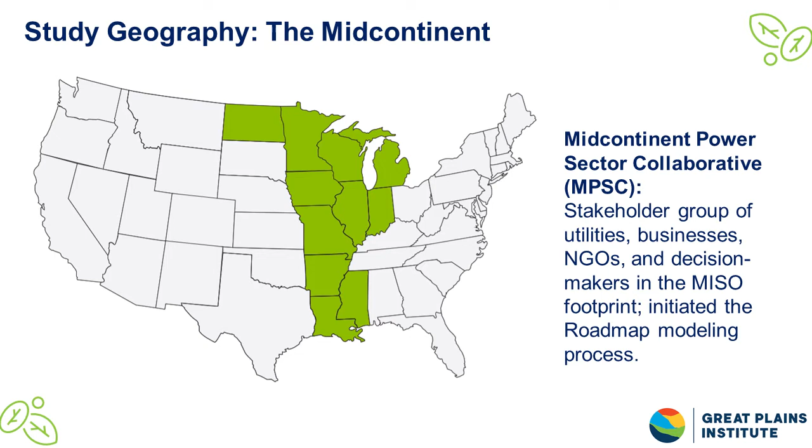This is the key geography that Doug alluded to, that the Midcontinent Power Sector Collaborative stakeholders honed in on to identify the study states for analysis across the roadmap. It extends from Minnesota, North Dakota, all the way down to Louisiana. You'll also see another map in a couple of slides, which is more of a configuration to the MISO footprint that Doug was talking about. But here you can see the states that we were thinking about.

So there emerged a handful of high-level strategies available to tackle building decarbonization, and we'll see how each of these thread through the presentation today. The first is enhancing building design to be more energy efficient, occurring both through new construction as well as improvements to existing infrastructure like retrofits. The second is finding alternatives to fossil fuels, including electricity and renewable natural gas. And finally, technology innovation—both improvements in technology as well as advancements in deployment of technology, with particular emphasis on heat pumps.

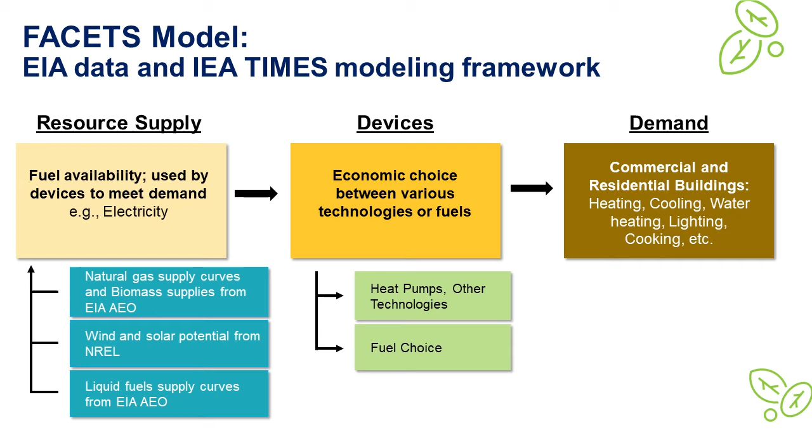So a model called FACETS was used to analyze decarbonization scenarios throughout our process. It utilized the EIA Annual Energy Outlook data and the IEA TIMES modeling framework. The diagram here shows an extremely simplified schematic of how the model works. It first assesses the resource supplies on fuel availability—an example of that would be the electric generators that might serve a heat pump. It then determines the most economic choice across all technologies and fuels or devices. Finally, it assigns use—the end use or demand for each of those devices, including building energy uses like heating and cooling, as well as a couple others. So like I said, very simplified, but it gives you an understanding of how the model flows.

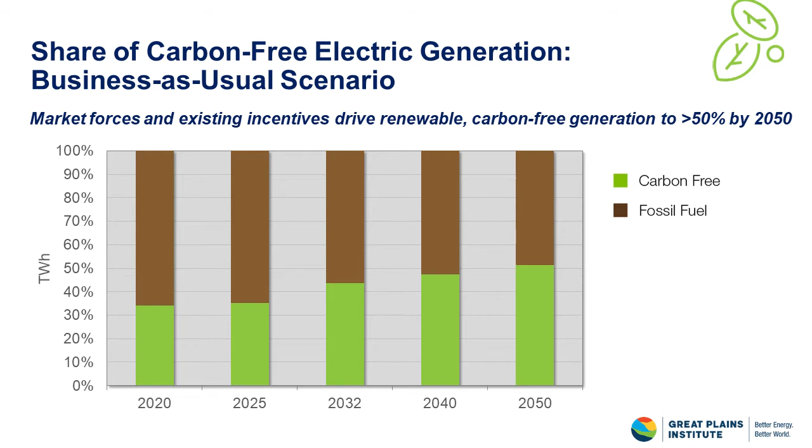This graphic provides a breakdown of the percent of generation from carbon-free sources over the 30-year modeled period. We see that market forces and already existing incentives do drive renewable and carbon-free generation to just over 50% by 2050, but there remains quite a ways to go to full decarbonization.

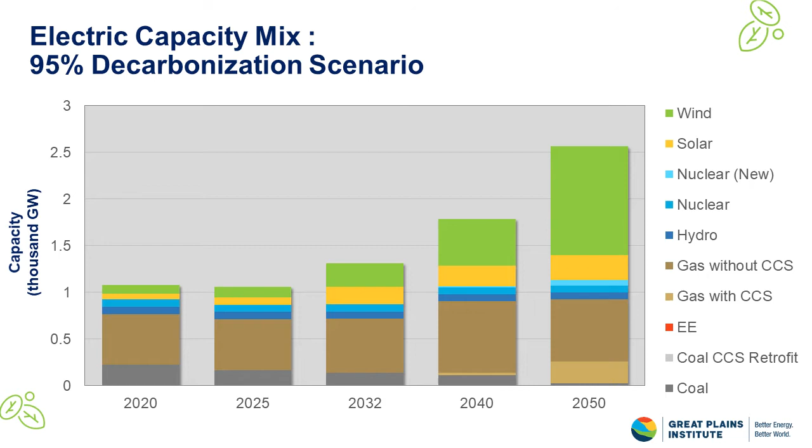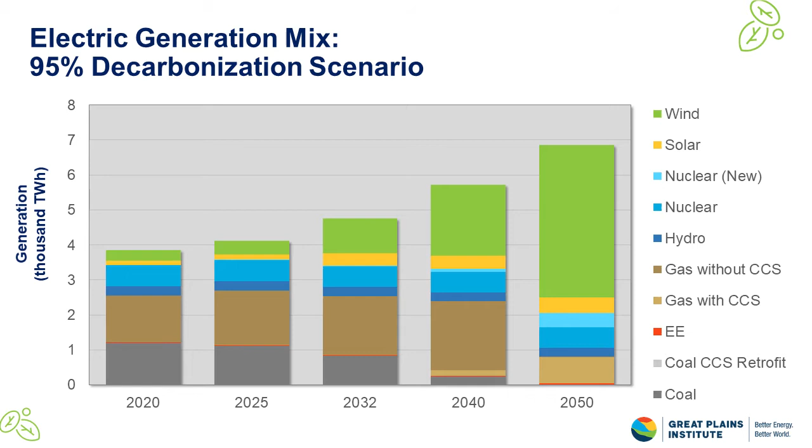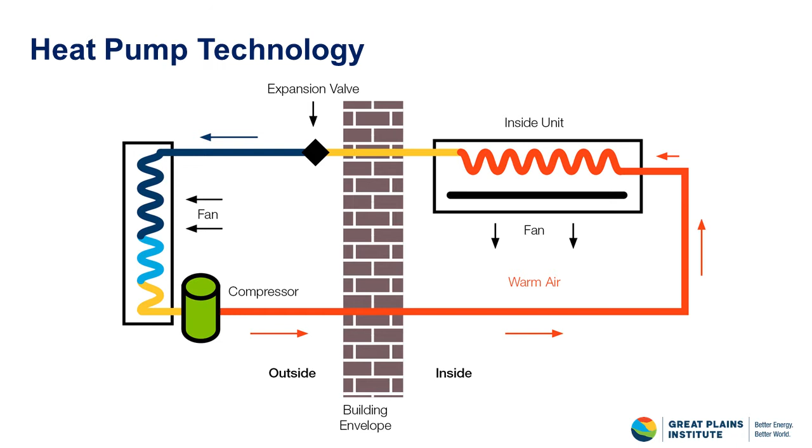Across thousands of scenarios run, we found that reducing barriers to adoption and improving technology were key factors in reducing building emissions. So we isolated the key factors most determinative of emissions reductions to identify key scenarios to analyze. The first was speed and rate of heat pump technology deployment across the Midcontinent, which captured both advancements in technology as well as adoption.

The second was heat pump technology performance, which determined whether backup heat is required below 10 degrees Fahrenheit for heat pumps, or if it can be supplied to augment a heat pump that functions on a linearly decreasing basis down to 20 degrees below zero.

So when I refer to this moving forward, it'll be backup versus linear. For linear performance, as heat pump capacity degrades linearly with temperature - it doesn't work quite as well the colder it gets - the backup requirement is the difference between the total demand and the amount of that demand the heat pump can supply. So it's somewhat simple math.

Third was whether the assumed hurdle rate, which serves as a proxy for the component barriers that could prevent heat pump adoption, may include cost, education, etc. Whether that hurdle rate more closely resembled a 20% cost adder or a 7.5% cost adder. So when we say low investment hurdle rate, we're saying we're going to reduce it from 20% to 7.5% in the analysis.

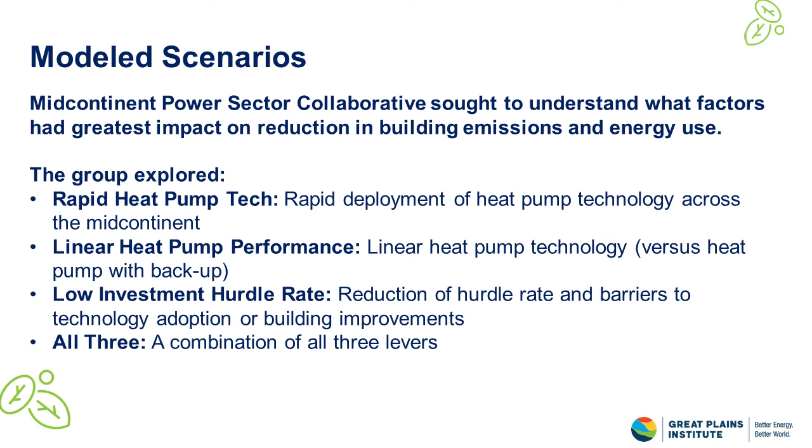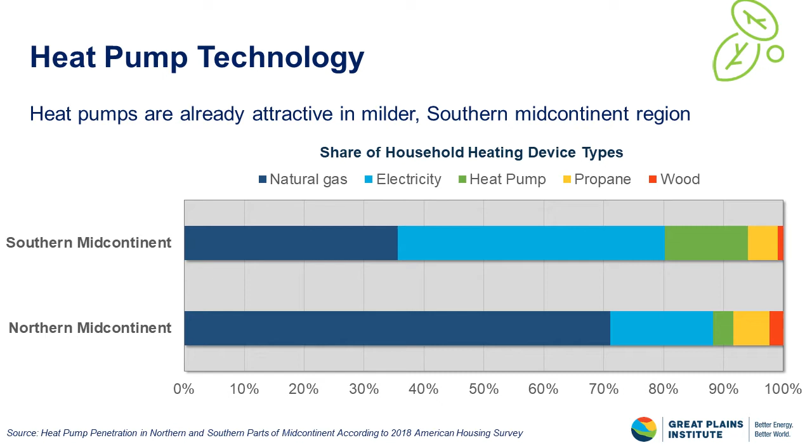The next couple of slides will dive a little more into the findings around heat pumps in the Midcontinent. We already understand that present-day adoption of heat pump technology is directly related to regional climate. The graphic shown here is household fuel technology estimates for both the southern Midcontinent, the top bar, and the northern Midcontinent regions of the study area. You can see the existing proportion of households with heat pumps shown in bright green. Historically, we have seen heat pump adoption occur organically in the southern Midcontinent as a home heating and cooling technology. However, heat pumps have been much less attractive in the colder climate of the northern Midcontinent, just because the backup fuel is required and climatic conditions pose additional barriers.

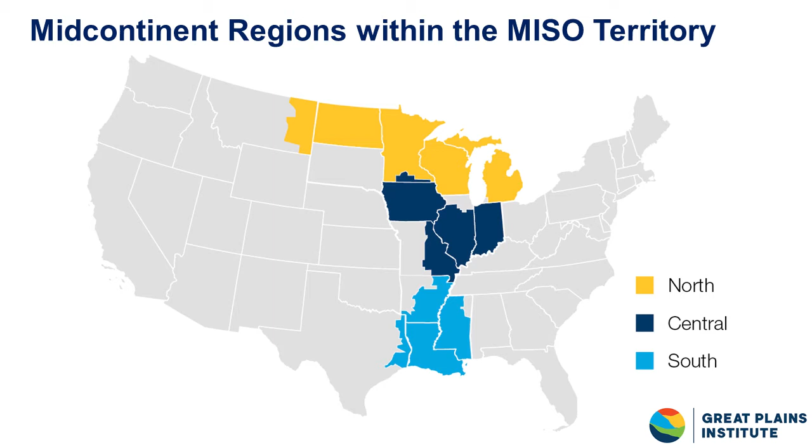This graphic is showing share of device counts, or the number of installed devices across all households, by year for the northern region. Because this is showing share of technologies chosen for install, it's important to understand that there may be households with more than one device—for example, when there's a supplementary technology to a heat pump, like wood, which you can see in this graphic, or natural gas, chosen as the backup. This doesn't indicate the consumption from technologies or that the technologies are all being used the same amount. We also know that some technologies, like ductless mini splits, automatically include an inherent backup, which is electricity. So if they were chosen by the model, there would automatically be two devices added for one household.

If we look a little more closely at this graphic for the northern region of the Midcontinent, the main area of the graph at far left shows business-as-usual share of devices from 2020 to 2050—what do installs look like if we do nothing? For the northern region, you see a moderate increase in heat pump installations, though natural gas forced air, room air, and central air still dominate the share of devices through 2050.

To then investigate those scenarios, we isolated the last 10 years of the analysis, 2040 through 2050, bordered in this black line, to investigate the impact of each of those scenario levers on the building device counts. As in the previous graphs, heat pumps are shown in bright green, and the key finding is that each of the scenario levers does result in heat pump adoption and penetration—across those four broken-out 10-year periods, the share of green is increasing over time.

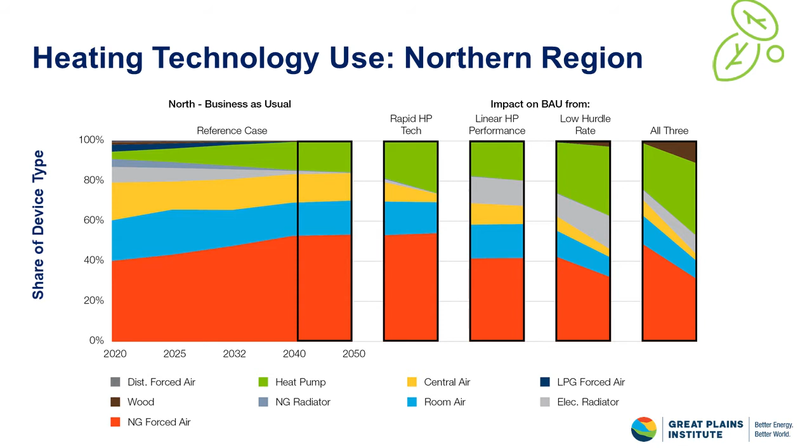We also see that when either the technology is more advanced for the northern climate—the rapid HP tech scenario—or the hurdles like cost are reduced—the low hurdle rate scenario—we see the most significant impact on heat pump adoption. However, the greatest impact is available when, as we learned, all three levers are implemented.

So now that we're familiar with the graph, hopefully we see the same thing for the central region. We immediately note the different distribution of device installations across the business-as-usual period, 2020 to 2050, but there's far greater organic heat pump adoption due to the more mild climate of the central region. However, we do see that electric radiators and natural gas forced air, along with central and room air conditioning, still comprise the bulk of devices installed across the reference case.

When we isolate those same key scenarios, we find that heat pump technology advancement has the greatest single impact on adoption, resulting in a decrease in both room air and natural gas forced air as compared to the baseline. A reduction of the hurdle rate also has beneficial impact on heat pump adoption, with a similar profile for other devices as did improvements in heat pump technology.

Linear heat pump performance also results in increased adoption, though devices are largely supplanted with electric radiators. And when we stack all three levers, we see the greatest heat pump adoption, as well as replacement of most natural gas fuel technologies with electric alternatives.

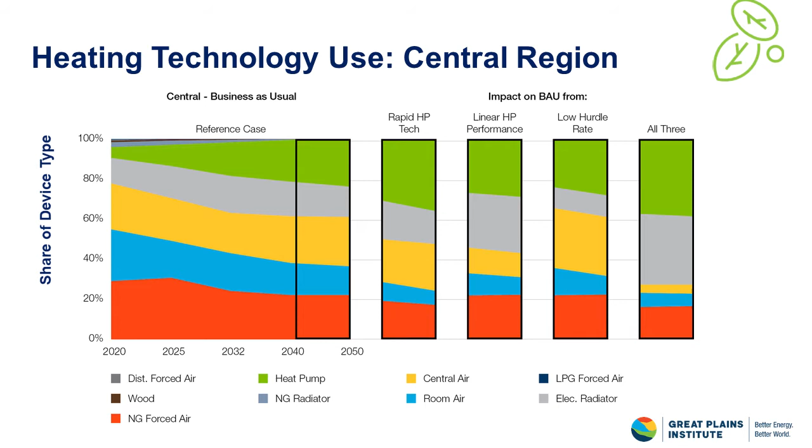And for those who read the roadmap, you may already be familiar with some of these. So finally, the southern region. We immediately see that in the south, heat pumps are flourishing by comparison to the north and central regions, and that's due primarily to the climatic conditions.

Here under business as usual, installs still surpass 40% of households by 2050 with no intervention. But room air remains the second most adopted device by share. There's also already a fair amount of electric resistance heat, though I mentioned ductless mini splits earlier. I'll caveat that the model likely wouldn't have chosen electric resistance as it's fairly expensive to run, but devices may have been installed when natural gas was historically more expensive.

So in the southern region, as we investigate those scenario levers, we find that heat pump technology advancement results in the greatest impact to heat pump adoption, as does reduction of the hurdle rate. Interestingly, the combination of all three levers, the all-three scenario, doesn't quite achieve the same heat pump adoption compared to the other two variables, or the dramatic magnitude, I should say.

And naturally, in the southern climate, heat pump performance has the lowest impact on adoption rates, though it does slightly increase installs. Across all scenarios, the primary alternative or supplementary devices for the southern region remained room air and electric radiators, regardless of the scenario, while all but heat pump performance resulted in a decrease in natural gas devices.

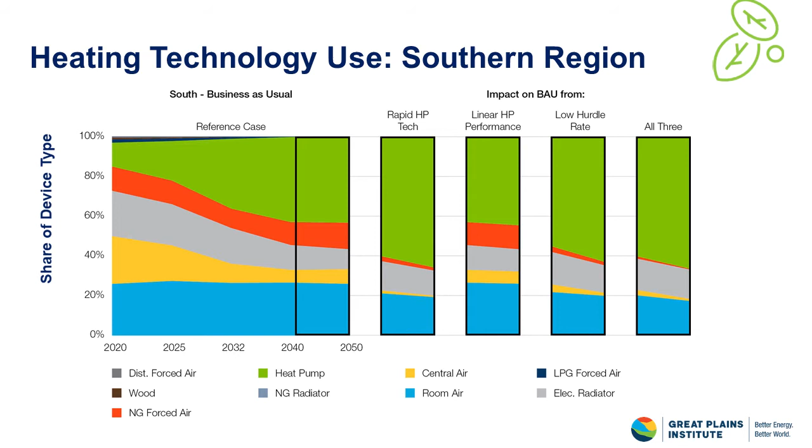However, we recognize that RNG will likely be a key player in helping achieve sector-wide decarbonization in buildings.

Finally, as alluded in the initial list of strategies we discussed, we analyzed impacts of the various scenario levers on building shell or envelope improvements, which captures things like weatherization or other efficiency improvements like retrofits. Unlike share of devices installed or some of the other dimensions that the roadmap did investigate, we found that the single greatest factor for building envelope improvements was the hurdle rate, which again was that proxy lever for the many barriers that might exist to undertake improvements, and that would include cost.

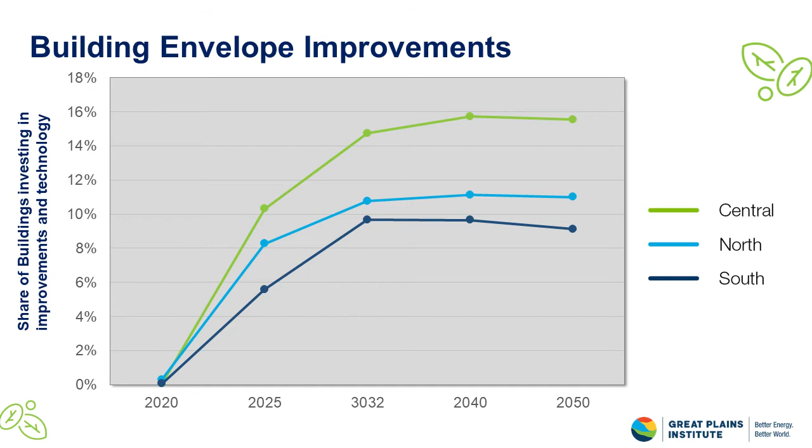This is followed by the northern region, where we see an almost 10% increase in shell improvements. And finally, the south, where building improvements increased by only 8%, which makes sense because it's likely where the improvements would have the lowest marginal cost return. We know that improving building envelopes will be a key strategy towards sector-wide decarbonization.

So now that we've had what I consider a whirlwind overview of some of the primary analytical findings from the roadmap, what are our key takeaways?

First, we found that electric heat pumps provide the most promising building decarbonization strategy available. However, even with their promising nature, they didn't quite achieve total decarbonization. This indicates that we need to stay vigilant on finding complementary creative solutions for the building sector. Other fuels like hydrogen or renewable natural gas will likely play a role in getting us the rest of the way there.

We also deduced that energy efficiency is a no-regret strategy. Building shell improvements help curb energy demand, and they can also occur in tandem with other technology deployments. So a true win-win. Similarly, reducing barriers to heat pump adoption can significantly increase adoption.

We found that tactics to reducing adoption barriers may vary by region, so a climate-specific strategy will maximize impact.

Our findings explored the heat pump limitations, including necessary backups for heat pumps in cold climates. Cold climate households can, however, utilize some emerging alternative fuels like renewable natural gas, though cost does remain a consideration. And finally, emerging fuels like hydrogen, synthetic natural gas (SNG), and renewable natural gas will be crucial complements to the suite of tactics to achieve building sector decarbonization by mid-century.

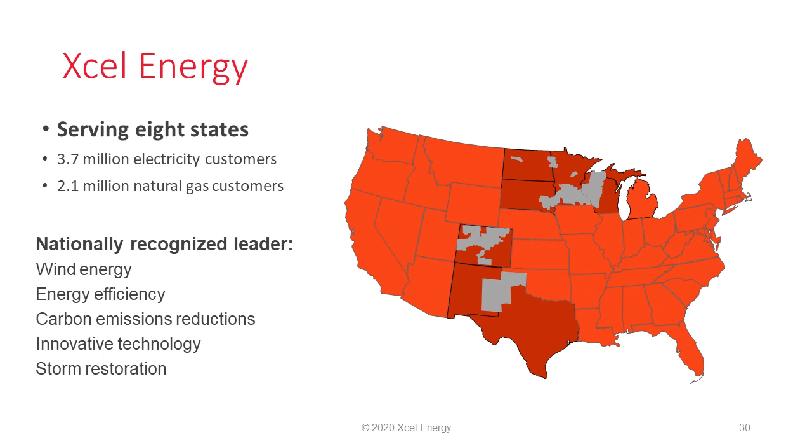It was driven primarily by 3 things: a strong year for wind generation and additional wind capacity coming online, supplying about 21% of all our electricity in 2020; a 19% decline in coal and gas generation, dominated by moving coal plants to flexible operations - changing how we offer them into the market and operating them differently to accommodate more wind and solar; and finally an excellent operating year for our nuclear plants, which had a combined capacity factor of 96%. Those are the primary drivers of our ongoing strong performance in reducing carbon emissions from electricity.

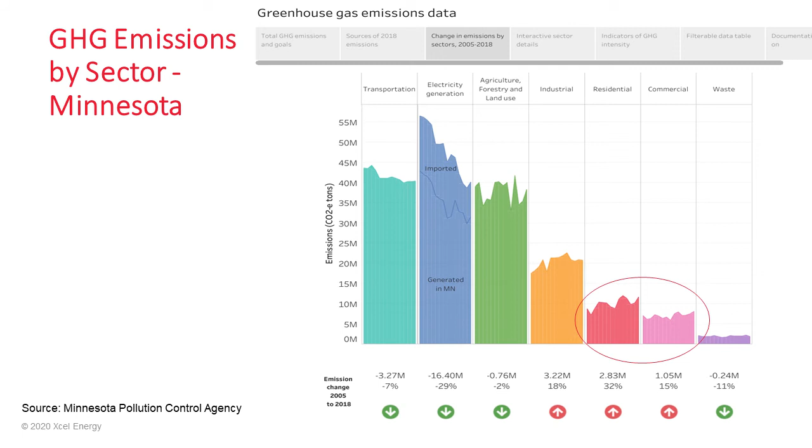When we talk about our natural gas decarbonization strategy, which is more fully summarized in a report we published in 2020 called Transitioning Natural Gas for a Low Carbon Future, we think of it in three pieces, three tracks: two of them addressing methane emissions and one addressing carbon emissions from natural gas combustion. I'll start with the middle one.

In the middle is the gas distribution system that we actually own and control. We're working—and I'll talk more about each of these—but in terms of an overview, we're working to have the tightest system possible, minimizing methane emissions, and also starting to think about how to integrate lower carbon fuels like RNG and hydrogen into the existing distribution infrastructure.

On the left is upstream natural gas—production, processing, transmission, and storage, everything that happens before the natural gas comes to us. We don't have as much direct control, but we can certainly exert leverage over our suppliers to disclose and reduce methane emissions. So there's a piece of the strategy that focuses on that.

Finally, on the right is carbon dioxide emissions. These, so to speak, belong to our customers because they're scope 1 emissions from natural gas combustion in their homes and businesses. But as their gas provider, we see it as increasingly our job to provide options for them to reduce those emissions, much like we started doing 20 years or so ago with voluntary renewable electricity programs. So we're working on that piece of the strategy.

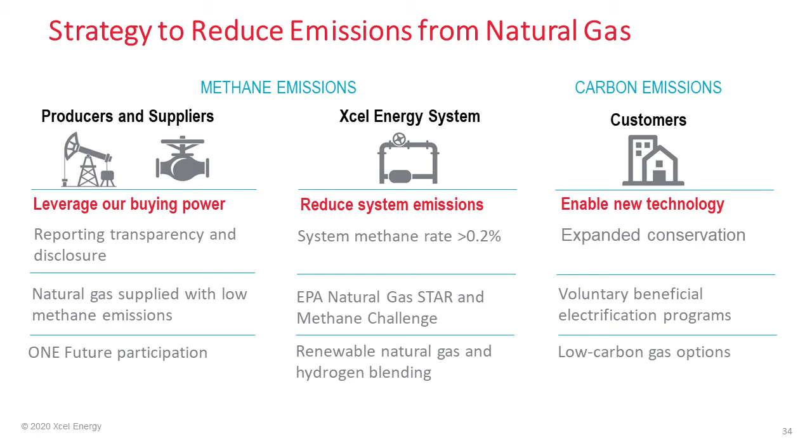First, on managing methane emissions—this covers both the upstream part and our own distribution system. On the distribution system, we've done a lot of work already. Since 2010, we've replaced about 3,000 miles of pipe. All known cast iron pipe and almost all the bare steel pipe has been replaced on our system, and that's important because, per EPA emission factors, that old pipe has higher methane emission rates than the pipe replacing it.

About three-quarters of our distribution mains and services is now plastic, and almost all the remainder is coated steel, with much lower emission rates. Between that and the work we're doing to minimize emissions during maintenance and improve methane leak detection, our upper Midwest system has a methane emissions rate of below 0.2% today. That's the distribution part of the system—it's a pretty tight system.

Now on the upstream part, upstream of the city gate where we take control of the gas, our strategy focuses on what leverage we can exert over our suppliers to get a better handle on methane emissions. The first part focuses on more disclosures and transparency, better measuring, and sharing of best practices. We're asking suppliers to calculate their methane intensity using the Natural Gas Sustainability Initiative protocol, which looks at emissions relative to total throughput across five segments: onshore production, gathering and boosting, processing, transmission and storage, and distribution. Then, as we get better data, we're thinking about procuring certified gas from suppliers with lower than average methane emission intensity.

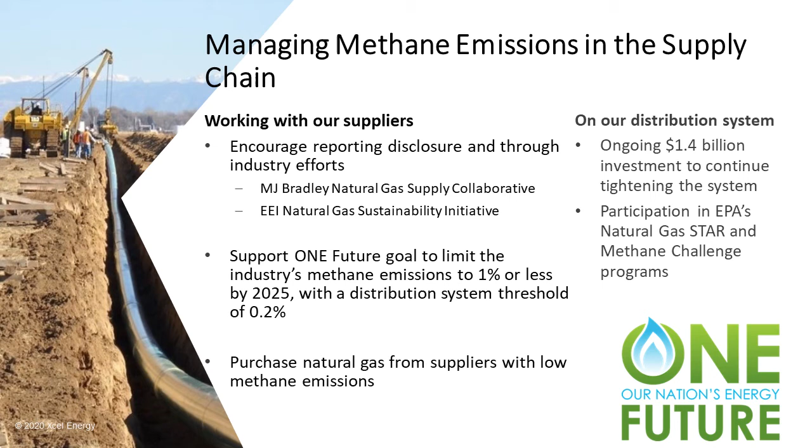Turning to the next slide, the customer carbon part of the strategy, and this is largely where the MPSC roadmap focuses. The challenges to this part of the strategy are really three, I think. Technology, so the alternatives to natural gas for building heating are less mature and more costly than the alternatives we now have on the electricity side. Cost, all of the alternatives are significantly more expensive than natural gas. And equity, some of the alternatives could be regressive or increase energy burden for our lower income customers if not designed carefully, and I'll talk more about that.

So our strategy in this part is really focused on targeted programs that are voluntary customer choice rather than mandates, and starting with pilots to kind of gain experience and be ready to scale those up as the technologies improve and costs come down. Those focus in three areas.

Improved efficiency: more efficient buildings, more efficient appliances. Secondly, beneficial electrification, so switching from natural gas to electricity in cases where that saves customers money, reduces emissions, and makes greater use of renewable electricity. And in that bucket, we're really focusing on things like all electric new builds, grid integrated water heaters, and over time, existing buildings using electric air source heat pumps with gas backup.

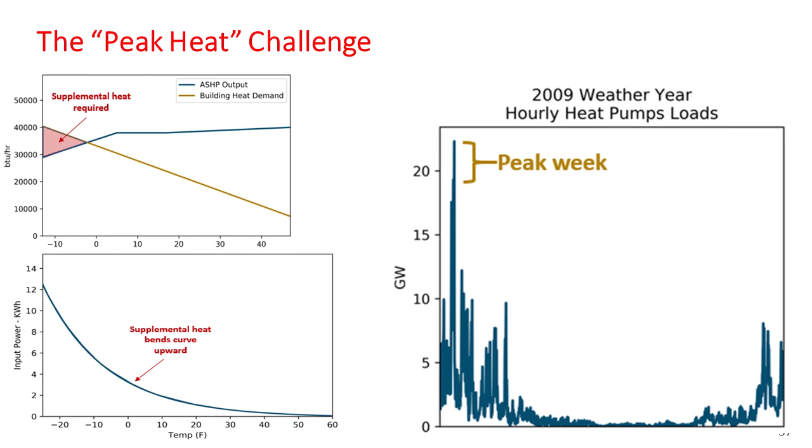Basically peak demand dictated by electric resistance heating of all buildings on the coldest day of the year. So what that results in is a very high winter peak for a very short part of the overall year. On the next slide, you can see the result of that in the work that E3 did for our resource plan.

We worked with them, we created a high electrification sensitivity that included enough electrification of transportation, building heating, water heating to reach the state's overall economy-wide 2050 goals. And what impacts would that have on the Xcel Energy system in terms of both the peak demand and the increased overall energy consumption?

We assume very low carbon electricity by that time. We assume significant building shell weatherization, so much tighter buildings. And what E3 did is develop hourly load shapes for the whole year out to 2050 based on a relatively cold weather year to sort of test the limits of this system.

Some of those electrified loads are quite flexible, like EVs, transportation. That's a lot of energy, but it can be kept off peak by charging during the nighttime. Some of those loads, though, like building space heating, are not very flexible. You have to have heat at all times of the day, so you can't keep it off peak. And so what you see in the chart is that moving all of those loads to electricity, it's space heating that has the biggest impact on our system.

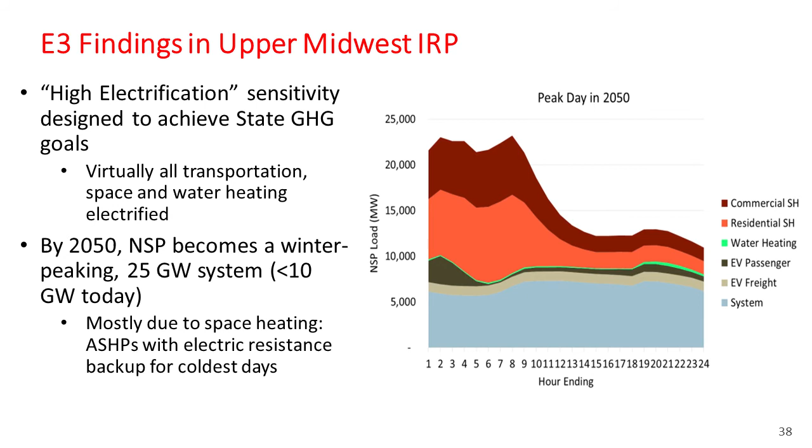First, how low should we push natural gas use or emissions within economy-wide goals? So Minnesota's 80% by 2050 goal, or if you want to say the IPCC net zero by 2050 goal, if that's maybe a more appropriate goal these days to target 1.5 degrees Celsius of warming. Those are economy-wide goals. They don't specify a goal for natural gas emissions or for the building sector.

So it could mean that we should push natural gas emissions and natural gas use to zero in 2050. But the climate scenarios, IPCC and others, don't really support that conclusion. They don't suggest you have to eliminate natural gas use. And those last reductions could be really expensive. So at what point how low do we push them? And at what point does it make sense to invest the next dollar in some larger emitting sector of the economy? That's an interesting question that I think is just starting to be discussed.

Secondly, the peak heat challenge that I talked about, and in particular, the overlap with the electric sector. So if you're trying to build a fully decarbonized electric sector, and we're seeing significant opposition to basically all types of firm capacity, gas, coal, nuclear, if you eliminate all of that, you're having to build, even just to address the current electric demand, very significant redundant capacity, especially to address those times when renewable generation in the winter can fall short of demand for extended periods longer than batteries.

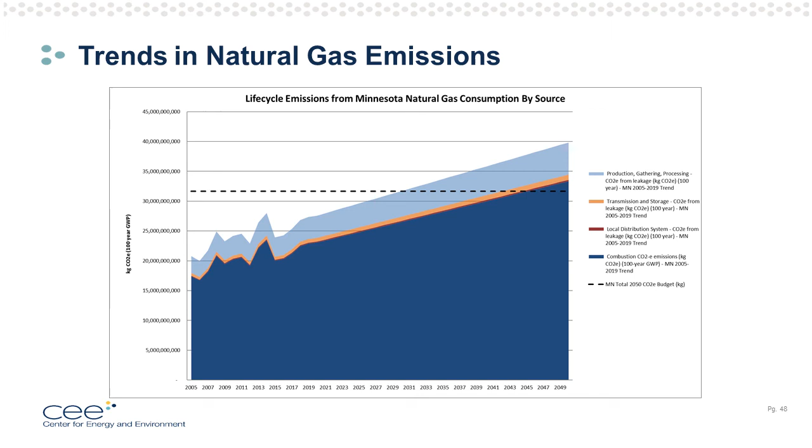Next slide, please. Now I'm going to dive into what CEE envisions for a decarbonized building sector. Last year, CEE put together a 2040 vision for equitable decarbonization of the building sector. CEE worked across all our internal departments to develop the vision document, and it describes an equitable future economy powered by decarbonized electricity and decarbonized gaseous fuels.

Sorry about that, you guys. It will guide the work we do over the coming years and perhaps decades.

The elimination of fossil gas in our buildings. The traditional gas utilities will be more specialized, delivering backup heat services, transportation fuels, efficiency services, and low carbon gaseous fuels. An evolved regulatory system will ensure the equitable allocation of system costs and benefits, avoidance of environmental and public health damage, exceptional customer service, and expanded customer opportunities, the development of a utility workforce representative of the communities they serve, and a commitment to support communities in achieving energy and environmental goals.

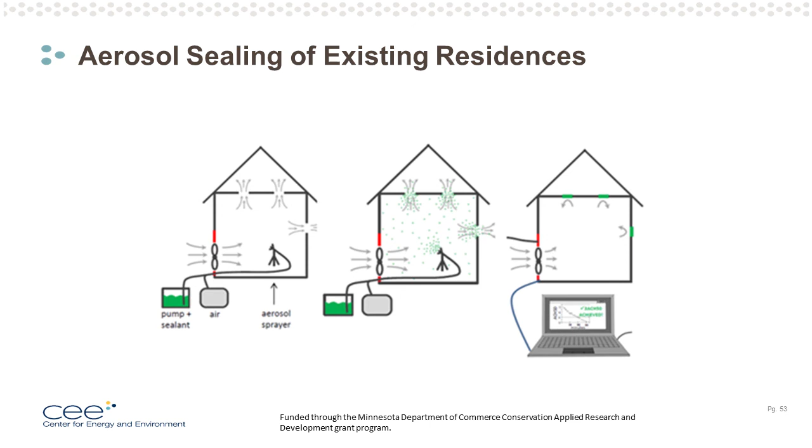Next slide, please. Another exciting CARD project is focused on what we call deep energy retrofits, which is essentially weatherization on steroids. Minnesota homes use twice the energy of the national average, and older homes have about 30% higher space heating loads than new construction, even though they're about 50% smaller.

Lower income residents are most likely to inhabit older building stock and thus face disproportionately high energy use and energy burden. Weatherization efforts have successfully delivered cost-effective envelope improvements for decades, but they don't go far enough, and weatherized buildings still lag new construction both in efficiency and comfort.

The goal of this work is to study envelope measure packages that make up the savings gap left by traditional weatherization programs. To date, prevailing thinking is that these levels of energy savings are not cost-effective, but no one has really tested that. So this study will identify opportunities to deploy the next level of weatherization measures necessary to create high performance envelopes. The study will detail existing building stock and applicable measures to understand savings, costs, and cost effectiveness testing across existing Minnesota single family homes.

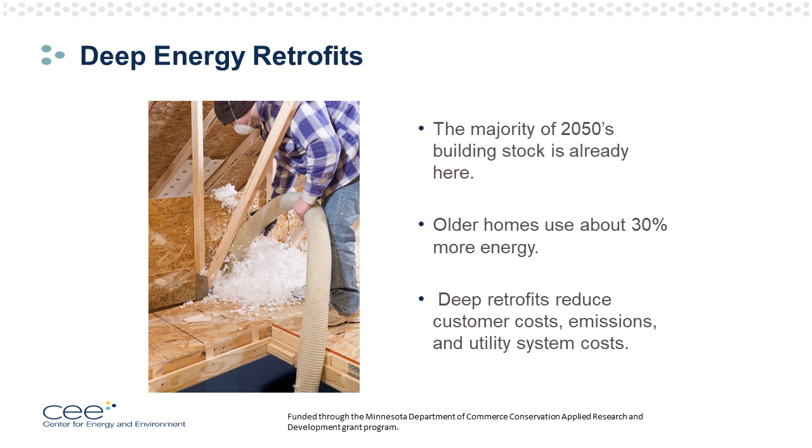This is the first step to identifying and thinking through the deployment of upgraded envelopes, which are not only the largest source of energy efficiency potential in the state, but are ultimately required upgrades to meet our climate goals.

Next slide, please. And now we're to my second favorite strategy, which I think Jessi said was her first. And we're going to talk about air source heat pumps.

Next slide, please. So starting back in 2015, CEE conducted field tests to study cold climate air source heat pumps in our Minnesota weather. The roadmap provided some great data showing just how important air source heat pump performance is in the coldest parts of the Midcontinent.

It's important for system efficiency and building level efficiency, but it's also really important that equipment meets customers' expectations and works as promised. CEE's work in this area found that the efficiency and capacity of older air source heat pumps drops significantly when temperatures hit about 40 degrees. But the newest generation of cold climate air source heat pumps can operate down to negative 13 degrees Fahrenheit.

CEE's researchers not only confirmed the operation of these new generation air source heat pump technologies, but also developed installation requirements and recommendations. And again, this was a CARD project.

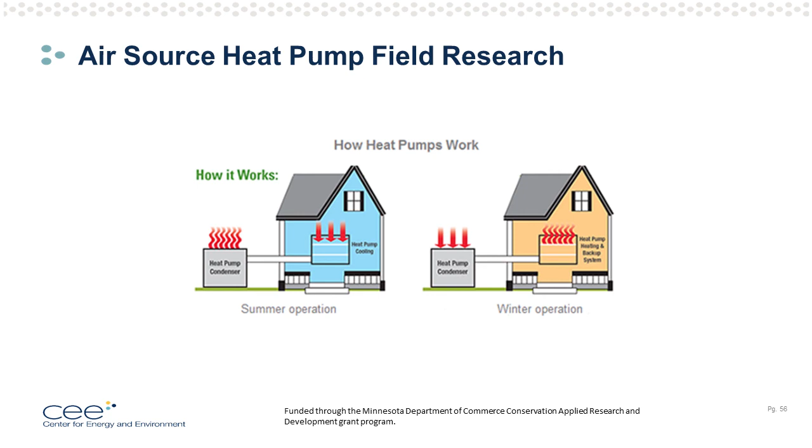Next slide. Building on that work, CEE research staff modeled cold climate heat pump performance across the typical Minnesota winter and summer to understand their impacts on energy use and the electricity grid.

Research staff found that heat pumps reduce the winter peaks of traditional electric technologies, so electric resistance, approximately 10 times more than they reduce summer peaks. What that means is that for every electric resistance home converted to a heat pump, 2 fossil fuel homes can convert to a heat pump with no effect on electric peak demand.

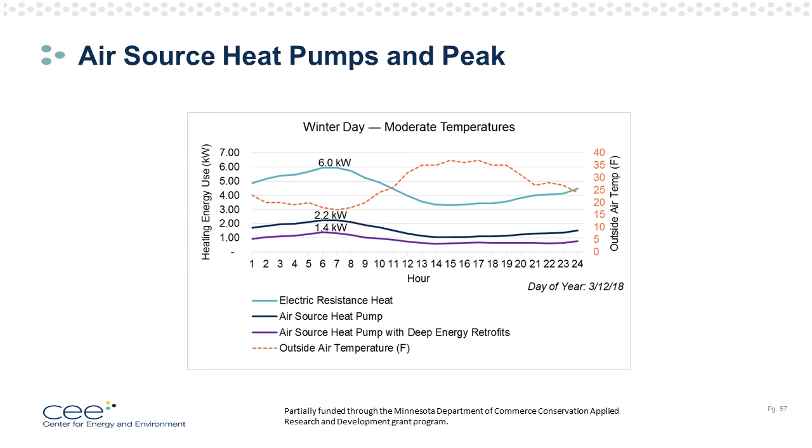This is an exciting finding because while most Minnesotans heat with natural gas, we do have a significant amount of buildings heated with electricity. Converting electric resistance buildings as we convert homes heated by fossil fuels gives us room to electrify while managing system peaks and of course costs.

Next slide, please. Here we've combined my 2 favorite strategies, building envelope efficiency improvements with cold climate air source heat pumps, to examine the costs of different heating and cooling options.

Our research found that deep energy retrofits save customers money and reduce peak electricity demand, and a well-insulated home can become a flexible asset for load management. A well-insulated home also moderates the operational costs of switching from gas to an electric air source heat pump.

At current prices, a natural gas furnace and typical central air conditioner still operate at about half the annual cost of a heat pump. However, insulating the home to a deep retrofit level decreases annual costs so that they are on par with the fossil fuel option.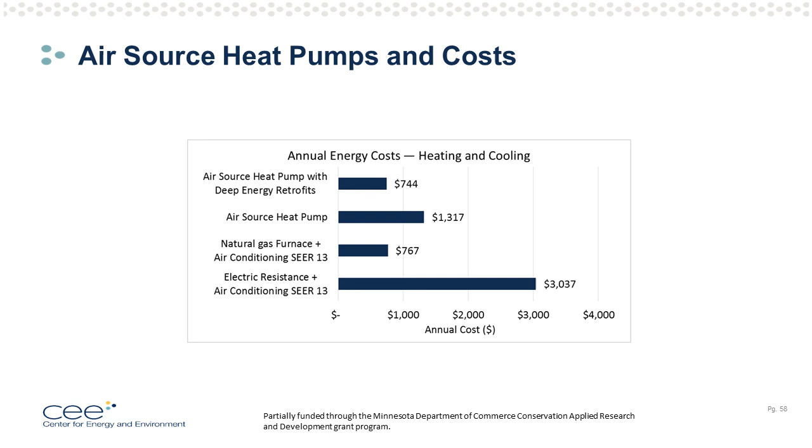Next slide, please. So clearly our research in the MPSC roadmap shows great promise for air source heat pumps in Minnesota, but that doesn't mean that they'll suddenly take off. As mentioned in the roadmap, there are plenty of barriers to air source heat pump adoption.

And so we formed something called the Air Source Heat Pump Collaborative. This effort is an attempt to lower what the roadmap called the hurdle rate for cold climate air source heat pumps. The Air Source Heat Pump Collaborative is a CEE initiative in partnership with 5 different Minnesota utilities working to accelerate the market adoption of air source heat pumps across Minnesota.

The goal of the initiative is to ensure that by 2030, air source heat pumps are the first choice for contractors and homeowners replacing electric and delivered fuel heating systems or air conditioners, and that every installed system will be optimized to provide heating as well as cooling.

Next slide. The collaborative is working to develop strong relationships with manufacturers, distributors, and contractors to more broadly and quickly spur market growth and bring down costs.

Our strategies include supporting technology advancement by providing guidance on beneficial application types, product specs, and installation practices; equipping contractors and distributors with knowledge and comfort of cold climate air source heat pump technologies; supporting aspiring market leaders to integrate cold climate air source heat pump knowledge and market growth tactics into their businesses; and educating customers by working with utilities and on-the-ground partners to inform customers about air source heat pump options.